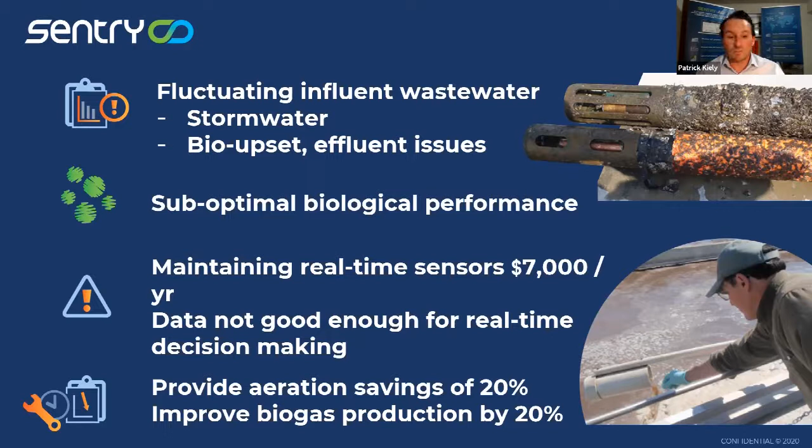So the presentation today, we're going to focus on anaerobic digestion. How can operators of ADs protect the performance of their bioreactors? We might look at, can we optimize how much carbon is being added to these digesters? Because that's the key driver. If you can optimize the feedstock, the organic loading into these digesters, well, that's a direct link to maximizing your biogas production.

And then, you know, can we set alarms in situ from the biomass that will notify us in real time when things are going wrong for our digester? Have we taken an offsite load of some organic stream that wasn't appropriate? Was it twice the organic load that we're normally used to? Was it half the organic load? Was there something else in that load that was acutely toxic to the biomass that just sent things going sideways? So can we use the data to set those alarms and notify our operators in real time?

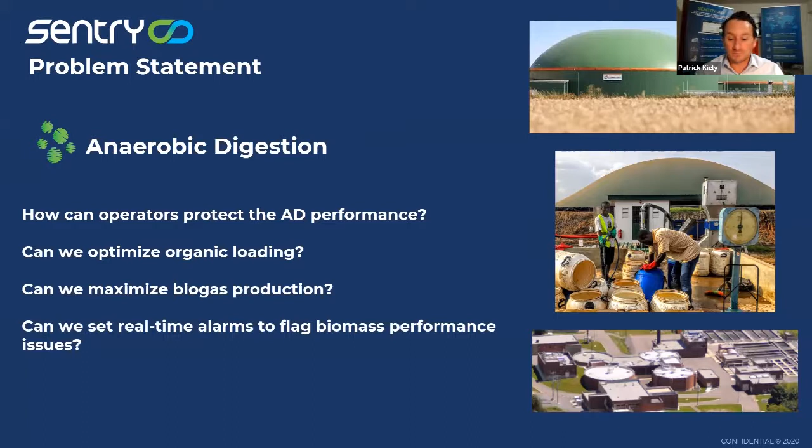Okay, so what is SENTRY? So the core of SENTRY technology, it goes back to the concept of microbial fuel cells. So what we do is, in our case, we take two conductive surfaces. We apply a very small voltage across those two surfaces. There's biomass already growing on these surfaces, and this biomass is mixed culture. It's a mixed culture of everything that's in your wastewater reactor already.

And what the biomass does when it's growing on these surfaces is it does the same as every other microbe in terms of consuming whatever organic carbon is available to them. So it's consuming organic carbon, and the only thing it does different is it donates its electrons when it's eating that food. It donates its electrons to these conductive surfaces, and we simply measure the flow of electrons from the biofilm in the reactor. So in a very real sense, what we've developed is almost analogous to a heart rate monitor for the biofilm or the biomass that's driving your performance.

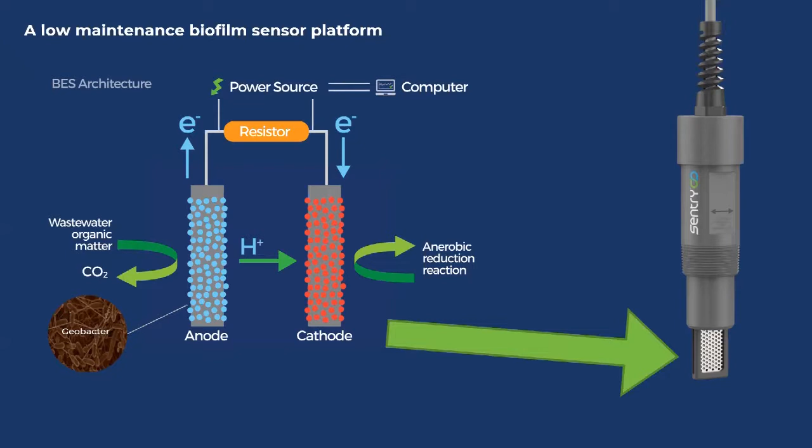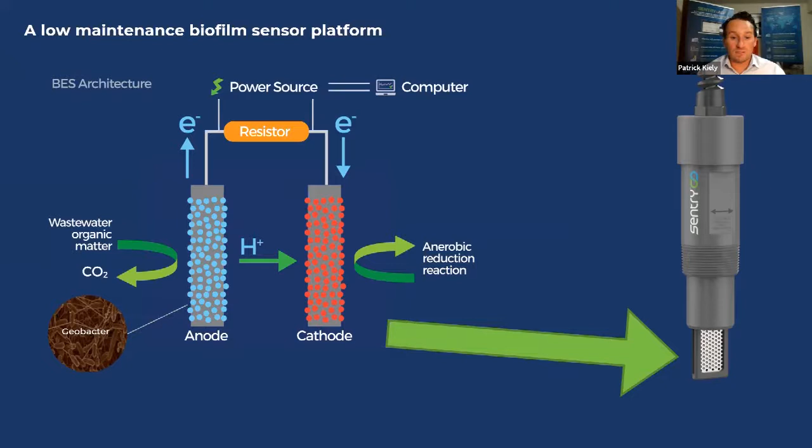And you can look at it two ways. You can look at it as a measure of how much food is being consumed, so carbon consumption rate, or you can look at it as just a measure of biomass health and whether my biomass is in a good zone of activity or whether we're pushing it too hard, there's too much food in the system, or whether there's not enough food in the system. But in a very real sense, we're taking biological activity and converting it into a digital signal for operators to see and visualize it and use.

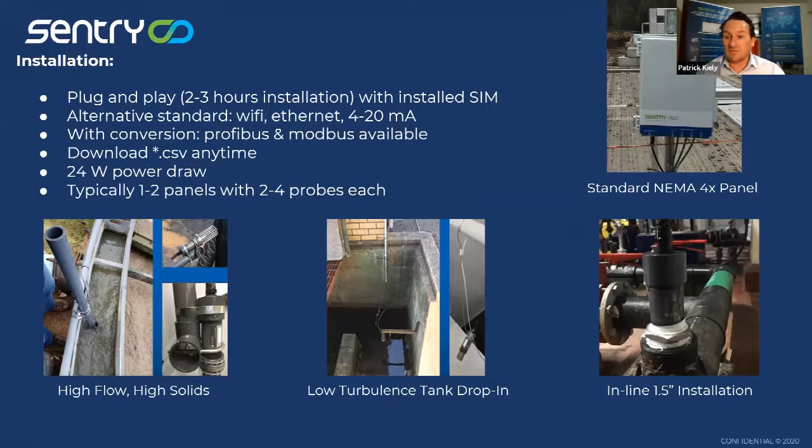For anaerobic digestion applications, the sensors tend to be hard piped or tapped into a recirculation line, very standard 1.5-inch NPT fitting. So you're just screwing the sensors into a recirculation line. Or a lot of the time with anaerobic digestion clients, we put our sensors at the effluent line of those digesters, and that tends to be a very good location as well.

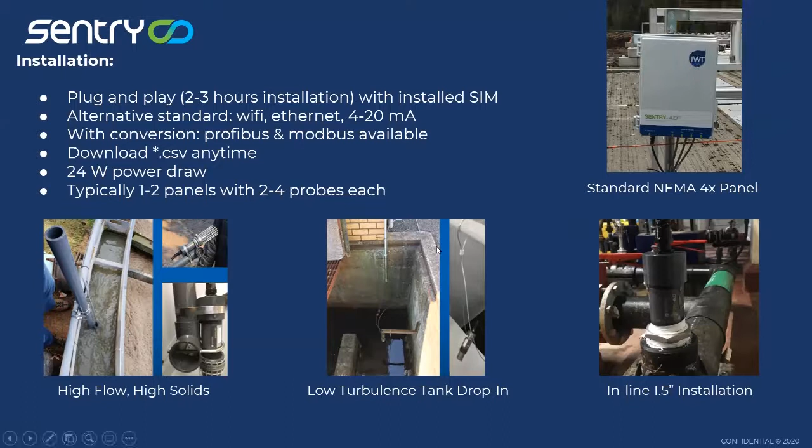So this is what the operator would typically see, or this is the experience. You take the sensor, you place it in the wastewater stream. So this, for example, would be in a recirculation line. The wastewater flows past the sensor. The biomass is growing on this surface and sending that information directly to a visual interface, so an online dashboard that you can see. And in a very, very simple way, and this is the most simple way that the information is used, we would set high and low alarms on the dashboard.

When there is more food in the wastewater than normal, that would trigger a high-end alarm for the operator. So the operator is now getting notified, okay, something has changed in my wastewater reactor, in my anaerobic digester in this case. There's now more food than normal. So what have I done in the last few hours that has caused that to happen?

Or on the low end, the operator might get notified as to a low-end alarm. And that would be typically one of two things. Either there's something acutely toxic in this wastewater right now, or this wastewater has been diluted in some way. Maybe I've reduced organic loading. Maybe in some cases, heavy rain, storm infiltration is getting into my process. But that is the most basic way.

So it's an always on, low maintenance platform that's notifying the operators and letting them see in real time what's actually happening in their reactors.

Patrick, how about we take a poll now? Good, thank you, Selena. Yeah, perfect. Okay, so we're going to do the first poll here, folks. Now the panelists can't actually answer this one. Sorry, Chris. Sorry, Peter. But everyone else can.

Okay, Selena, you tell me when. We'll give people 5 more seconds. All right, folks. I think you can click more than one answer as well, so don't feel like you can only push one. Okay, now I end the poll. Let's see the result.

Okay, so yeah, perfect. That makes a lot of sense. Biogas is the main one. If you're looking to measure the performance of your system, looking at biogas production certainly makes a lot of sense. VFA analysis coming in second, that makes sense as well. And hopefully we can help people replace some of that VFA analysis maybe, or certainly complement it with more in situ data.

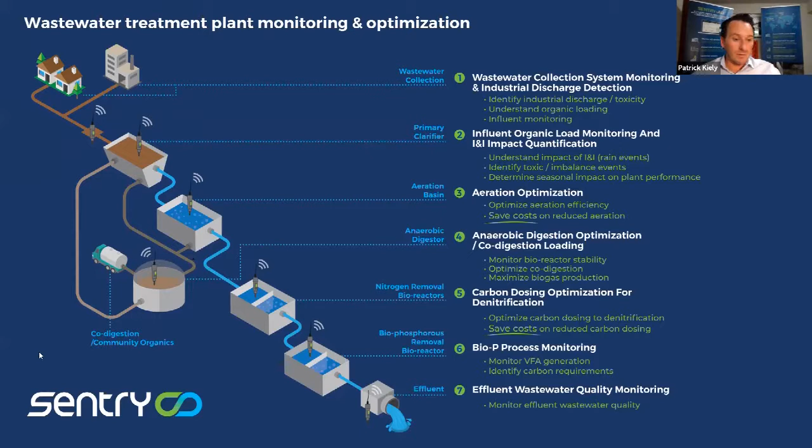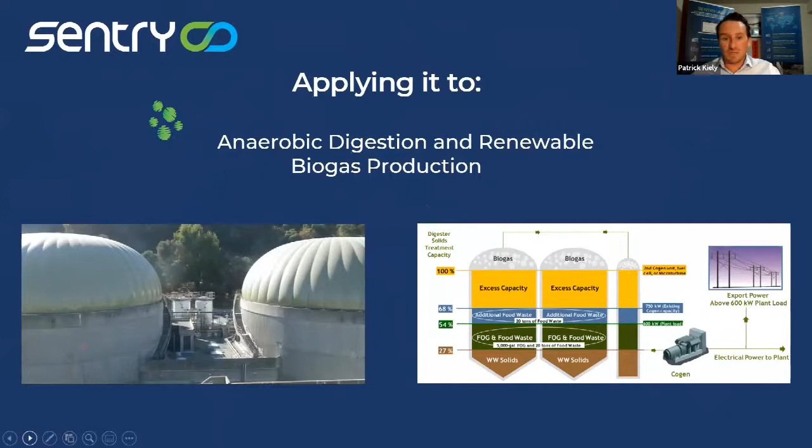Okay. So let's go on to our presenters for today. We're going to talk about anaerobic digestion and renewable biogas production. For the first case study, I'm going to introduce Chris, who works with us at the Bakerview Eco Dairy in British Columbia. Chris, do you want to take it away, and start with who you are and what you're doing with SENTRY, or at the Eco Dairy.

Yeah, thank you. Appreciate the opportunity. So back in 2010, I built the very first on-farm biogas plant in British Columbia. I came out of telecom. I stumbled on the idea of anaerobic digestion on page 63, a little sidebar story at the back of Popular Science. I was doing mobile asset management and mobile information management. I really didn't understand then that I was moving into a new realm of information sciences. And only recently are we getting there.

I completely trusted the science. Germany had 7,500 plants. There were thousands of these things done industrially. I thought these guys really understand all the science. This is just a business case problem. That's why we don't have more of them in Canada. And I set to work and ended up after a couple of years with $1 million in education from that.

I built the very first on-farm biogas plant. A fellow named Bill Vanderkoy built the second on-farm biogas plant at the Eco Dairy. It was in itself a study to see if you could economically do on-farm biogas at very small scale. The reactor's built for 60 cows, and resoundingly the answer came back, no, you can't. There's no economics for it. It costs you somewhere between 18 and 32 cents plus a lot of work to make something you can buy for 7 cents. It's not a good case. And it was shut down a number of years ago.

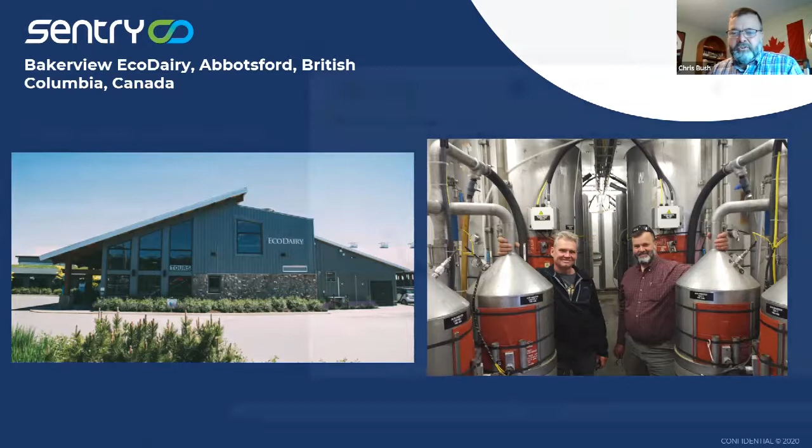And the tools that SENTRY gives us, it's real-time. Patrick, correct me, I used to call it a lie detector because it's reading all these things from your bugs. It's more of a Fitbit, and it tells us how the bugs are feeling about things. What we have been able to do with the SENTRY tool in this biodigital convergence, we have a sensor that tells us exactly what is going into the reactors: nitrogen, potassium, phosphorus, ammonia. Ammonia is the specific trigger we're chasing.

We've got the SENTRY that tells us how our microbes feel about what we're doing. We've got a gas chromatograph. We've got a machine that tells us exactly what is in the gas. We have another machine telling us how much gas is being made. We have another sensor pulling all sorts of environmental data just from the ambient, all the things around us. And then another company called AgriLize is taking all of that data and putting it into a single time-aligned stamp.

And while we're gathering all that information, University of British Columbia, the Hallam lab is mapping the metagenome of the microbial community. So what bugs are working and who's moving, what's the community movement. We're intentionally crash testing the digesters like they crash test cars to see what's going on. And we've just sponsored a data analyst through Mitacs with the university that's hunting for signals. Because on-farm biogas is really run reactively.

The poll that you just did, everybody watches how much gas they're making, right? People do FOS/TAC, but usually we'll do a FOS/TAC after your gas production goes down that tells you, oh yeah, there's a problem. There is a problem now, and we've possibly had a problem for the last 2 days. So if we could get more kind of predictive data up front to say, okay, something's changing. Let's be aware of that right now, and let's try and make this change before we have that dramatic impact on our biogas production.

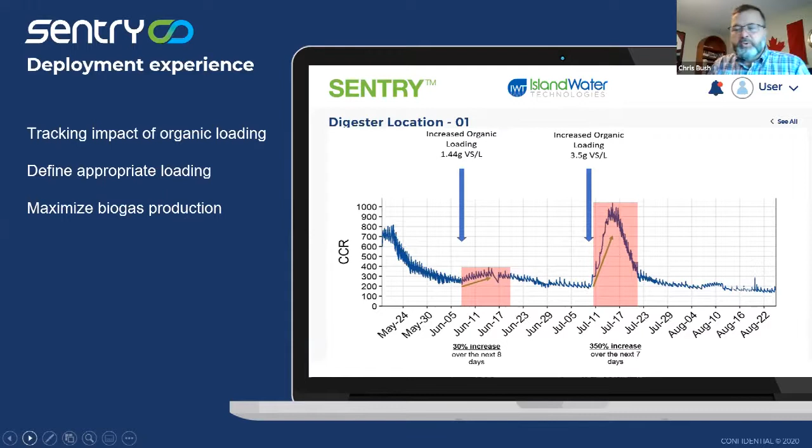Yeah, for sure. And our facility, we're specifically doing manure only, no off-farm materials. But if you are doing off-farm materials, you get some number of trucks coming in every day, and you will have some listing of what it's supposed to be, right?

And hope that it's consistent. But with this system, Patrick shared a story about a plant that every 3 weeks, say, they have some event, and the SENTRY showed that event as it was occurring. So they said, okay, what's happening? And they went and they found it, and the truck, every 3 weeks, went to some other place before it came there and had a residue that impacted the digester.

That could save a company thousands, maybe tens of thousands of dollars, a discovery like that. And the cost of SENTRY, I would bet for many, it'd be paid back in hours, maybe, right? Especially hours of an event, it could be paid back in minutes.

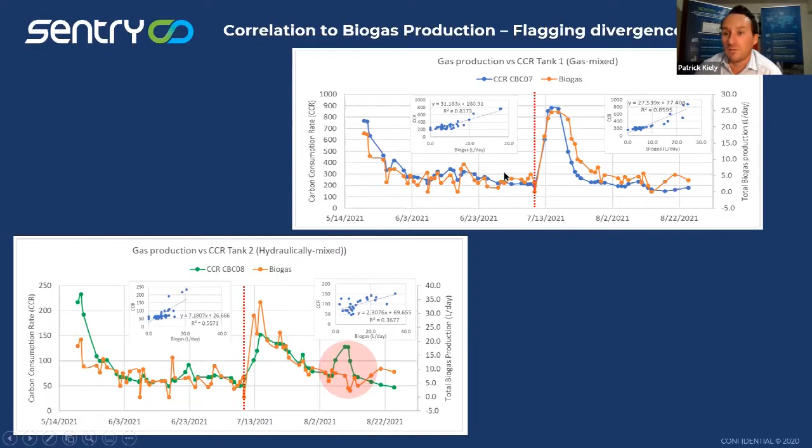Because when we can see these trends starting to happen, we can intervene. We want to have those lines all to be very flat if we can, right? And get them to the highest possible level. Yes. Right. And in a weird way, you could do that here. You're optimizing those batch feeding cycles. You could shorten those periods where clearly the signal is low and there's not a lot of food, and maintain those higher levels of activity. And that's where you have your maximized biogas production and stable microbial performance.

Yeah, our larger reactors, when we get to the 4,500 liter in that earlier picture, there's actually 6 reactors there in 2 chains, right? We're able to see the timing and all sorts of things. And we bought 18 of these SENTRYs to put all over this place to see the timing and all that. In reality, a commercial digester is going to be bleed and feed, where you'll be semi-continuously feeding and then driving off some material, right?

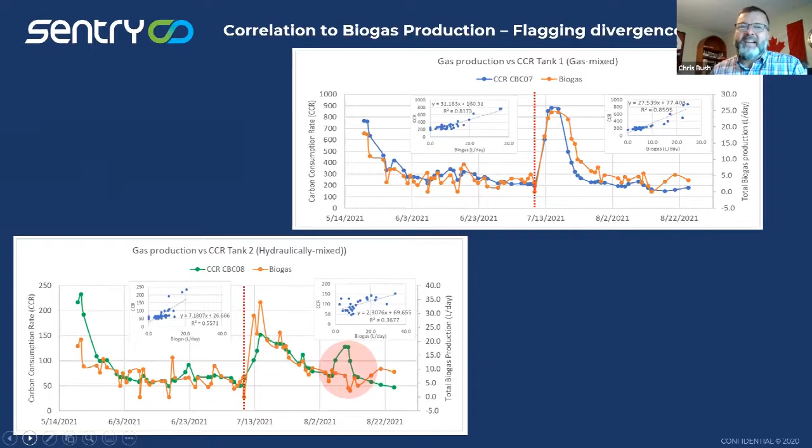So we won't have these big spikes, but we really want to amplify these signals right now so we can understand, because they'll be harder to see in that continuous feed system. But again, this is all stuff that was simply not possible without a bioelectric sensor like this that's in place right now. And the fact that they're so cost effective means you can buy a lot of them.

You can get lots of information, right? Fantastic. And yeah, I absolutely love the tool, and we're excited about what this means, because we really do intend to revolutionize on-farm biogas with community scale facilities. And the more information points you have, the better job you can do. We need to make these more reliable, right?

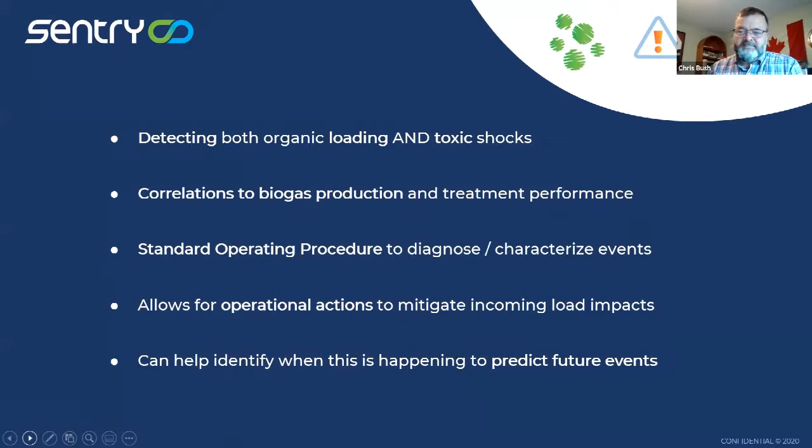Because a biological crash, if you're just chasing your tail with FOS/TAC, something could have happened 2 weeks, 3 weeks before you really see it. And by then it's really too late to intervene. Yeah, exactly. Okay, Chris, thank you very much.

Thank you very much. I'll just summarize briefly here in terms of just some of those outcomes. And then we're going to go over to Peter. And it's actually very exciting for Peter, because Peter's done a similar thing to you in terms of starting at the pilot scale. So I think that work will certainly resonate.

But just to summarize some of the things that we were doing and continue to do with Chris: detecting and quantifying the impact of those changing organic loads, correlating that signal to biogas production, and really trying to flag those periods when they diverge, because that's when you know something bad is happening in your reactor. Using the SOP guide to flag those events.

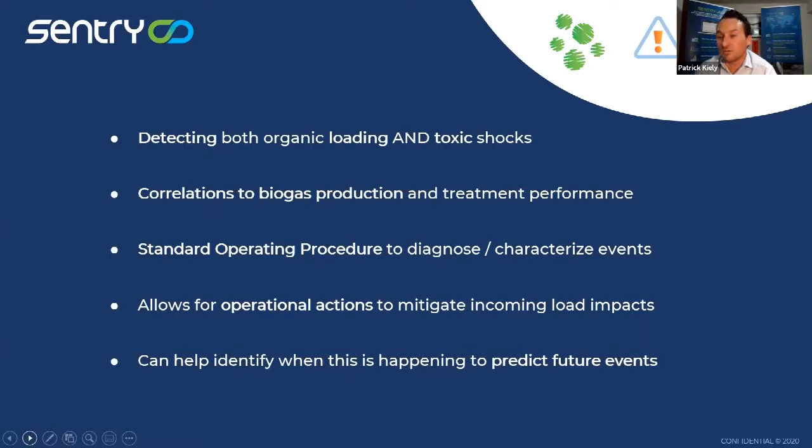So if there's an alarm from SENTRY, going back to the SOP and trying to figure out, okay, well, what's actually the root cause of that? And just optimizing, generally speaking, optimizing the loading to the digester and maximizing performance.

I'll just add, Patrick said about something bad happening. We are also watching for something good happening with all that information, trying to figure out how to make that good thing happen more often. Yes. Right. And again, these are just tools you don't otherwise have. If you don't have real time, you miss it, and you can only theorize what might have gone on. We're going to get all that information. Thank you to SENTRY. Thank you, Chris.

Love it. Okay. Next up, Peter. I'll do a quick introduction, Peter, maybe, if that's okay, and then we can just go back and forth on slides. So we got connected to Central Marin 2 years ago, I think. Peter, it's been a while now.

And Central Marin really are one of the leaders, I would suggest, of forward-looking municipalities in terms of the wastewater treatment side, looking at it as a cycle, and looking to opportunities where renewable energy can be generated, and where the plant can be more efficient or effective. So in terms of co-digestion, leveraging those on-site digesters and trying to generate as much biogas as is realistic from those assets is something that Central Marin has been leading on in the US.

We connected with Central Marin 2 years ago. They communicated to us that, yes, we're looking at taking offsite restaurant waste, fats, oils, and greases, that type of restaurant waste. We're looking to blend that into our municipal digesters. And we have a pilot system that we're testing with Black & Veatch, and we're going to look at the impact of different organic loads into these pilot systems to try and identify the best blend for our digesters.

But the problem is you want to have the right blend, but you also want to make sure you're not pushing it too hard, and that you're not putting something into that digester that's going to upset your biomass. So it was with that general problem statement that we got connected, and we're now through our pilot scale testing and installed in the full scale digesters. Do you want to maybe just speak, Peter, to your facility, what you're doing, where the sensors are? Yeah, sure, absolutely.

So I'm Peter Kistenmacher. I'm the technical services manager here. We are a municipality. We service about 100,000 population equivalents, about 10 minutes north of the Golden Gate Bridge in San Francisco. You can see our plant there on the bottom right, about 10 MGD dry weather flow, mostly residential, not a lot of industrial. And we have 2 anaerobic digesters where that green arrow is pointing, with membrane covers, about 1 million gallons each. And that's it.

We've been happily operating that way for many, many years, since 1985. About 10 years ago or so, we started taking small quantities of source separated food waste. You can see the process there on the top left. That happens at a solid waste transfer station down the road, where they're taking restaurant waste, grocery store waste and the like, and doing some minimal pre-processing, putting it in a truck, bringing it over to our site, and then we inject it in the digester together with our wastewater solids. So we have been doing that, like I said, almost 10 years.

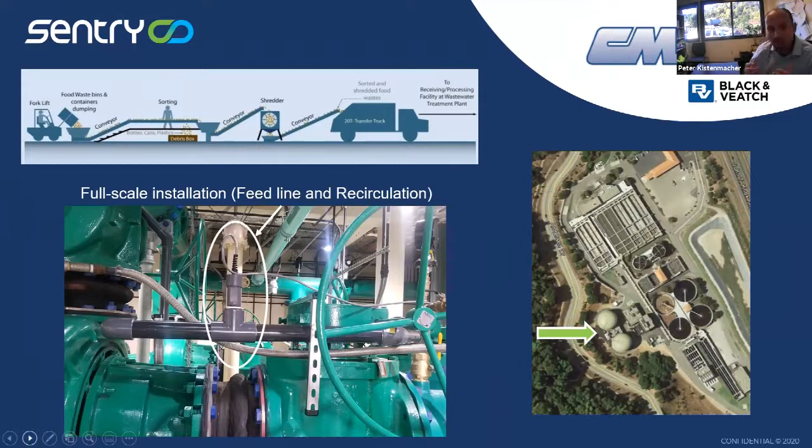We realized we had a lot of extra capacity in the digester, because the population isn't growing fast here, and we wanted to put in more external feedstocks, including fats, oils, and greases, and these engineered food waste slurries that came from other places in the Bay Area. But the consulting community cautioned us that other agencies had run into problems when they pushed that organic loading beyond 30% from external feedstocks. And only having 2 digesters, we really cannot afford a problem, because there's no redundancy for us.

And by the way, we do monetize our biogas. We're completely energy neutral, and we export a small percentage to the grid and get paid for that. And we're very high power cost out here in California. So loss of a digester, loss of biogas production is a significant financial hit for us, as well as we don't get the tipping fees that we get from the food waste and FOG that we receive.

So most important to us is minimizing digester disruptions. And then of secondary importance is optimizing how the digesters work so we make the most gas and the most revenue. So we decided to do a pilot together with Black and Veatch and Carollo Engineers and a few other organizations, and we said, that's a great opportunity to use this new sensor in the pilot and see how it overlays with all this large amount of data that we're collecting.

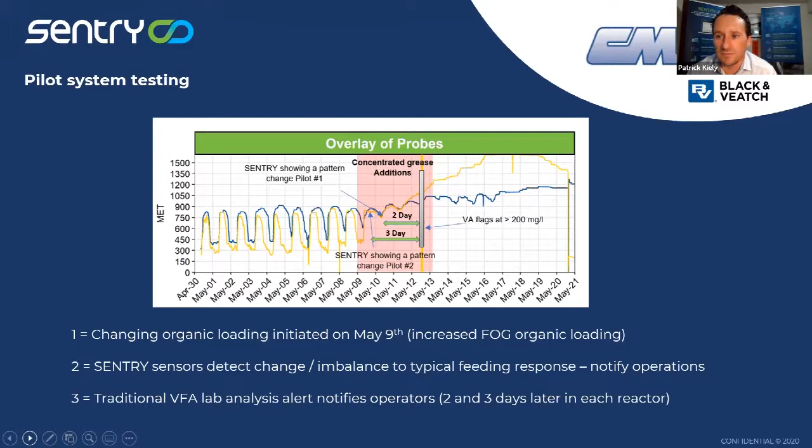And did you guys settle on a blend percentage that you think is most appropriate at this stage based on that, or do you have a feel for that? The main question was, can we go over 30%? Because again, there were these industry studies, I think it was LA County Sanitation or others, that said anytime you go over 30%, bad things happen. So for sure, we went up to 60, 70%.

Now, the nuance of that is, what is that 60, 70% made out of? Because we have 3 different things. We have FOG, fats, oils, and greases. We have solid food waste that I showed you earlier, and then we have this engineered slurry. So, there are some nuances. We do not feel that comfortable going to 70% with FOG, for example, because we have no control over where it comes from, what's in the truck that day. But the two food wastes, for example, they're much more stable. In fact, that's a great segue here.

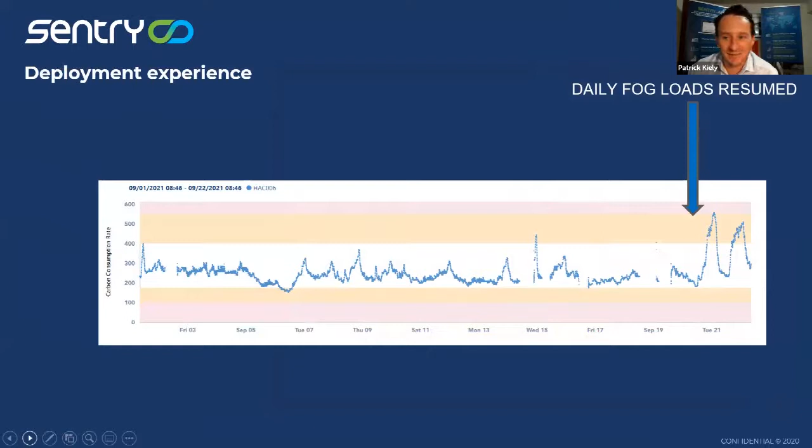in addition. So at the end of August, we started layering in the second stream, and you can see it's not as volatile as before, but it's definitely more activity and a little bit more volatility than when we didn't take it. Exactly. And then, just to bring it up, I pulled this up from yesterday. So this is hot off the press. Yeah, exactly. That's Tuesday 21st.

So what we decided is, because the engineered slurry was working well, digesters are happy and healthy, let's take 1 truck a day of FOG as well. So we just started that last week. And I think it took a couple of days, because it's only 5,000 gallons into a 1 million gallon tank. So it just takes some time to work itself into the signal and into the tank. But yeah, the last 2-3 days, we saw a significant change in the SENTRY signal.

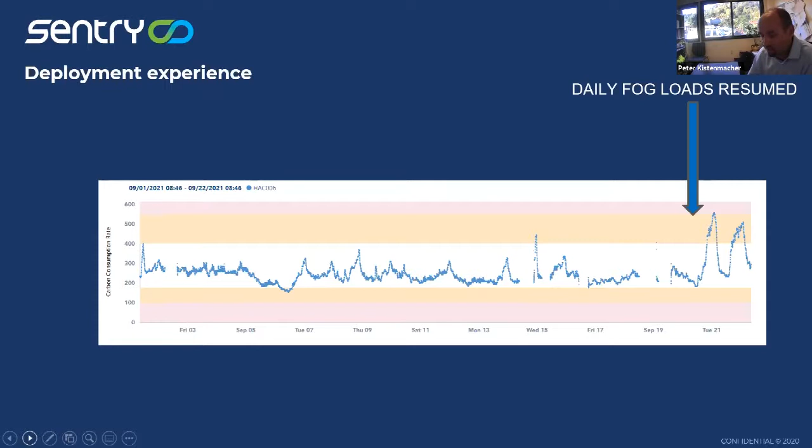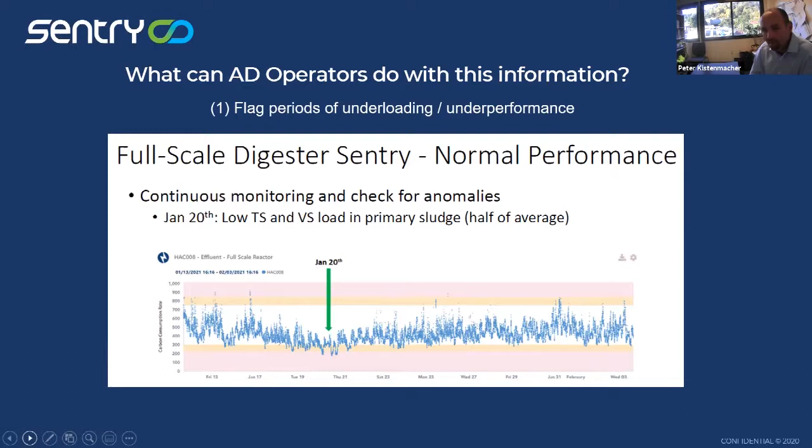I think if I was going to just make the final point, if we go back 2 slides to this one, the main sort of epiphany for me was, if we looked at our traditional digester health metrics, which is mainly volatile acids, alkalinity and the like. And just because of the size of the organization, the cost of sampling, staffing, and timing, we can only get sort of one sample a day, and some weekends even zero. If you had looked at those on this graph, it would be basically a flat line, and it would have shown us that there's no difference on these different feeding regimes.

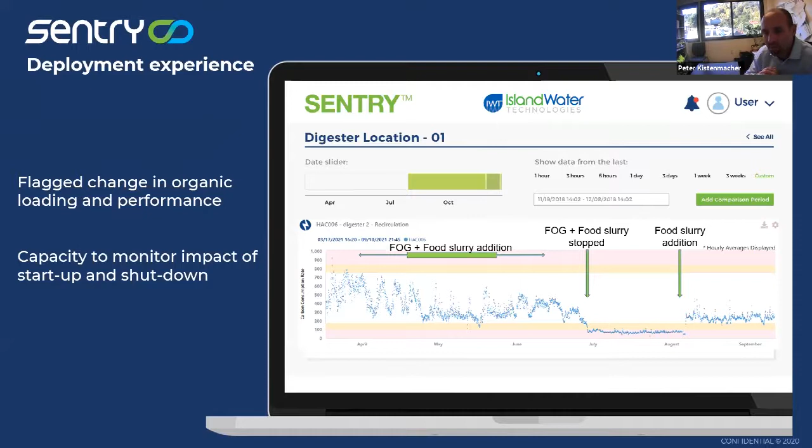But because we have this much more, like Chris said earlier, real-time data now, we're actually realizing that digesters are acting very differently depending on how we feed it, and just having so much more detailed information, it's just really nice to have.

Fantastic. And then the one I'll just wrap it up with, Peter, is how we tie it back to the SOPs. And I think this is where we're at together at this stage: we have data and we know it's valuable and we know it tells us change, but what does that actually mean for the operator, and what does the operator actually do when he or she gets an alarm? So that's where we're at now with you: okay, it's a high-end alarm or a low-end alarm. What do I actually do based on that information? And that's where we're trying to figure it out right now based on our SOP guide. That's exactly right.

Fantastic. Okay. Peter, thank you very much. That's remarkable. Thanks very much. Chris, also, thank you very much.

The reason I was so excited to get both of you on here together is because your paths are very similar in terms of not just saying, yes, give me a sensor, I'm going to put it in my full scale digester and believe everything you say. It was kind of the opposite. It was like, give me your sensor and we're going to test it for 12 months in a pilot scale system and make sure it works. And then we'll ease into this and start making decisions on it more slowly. Just really happy that we've come along that path.